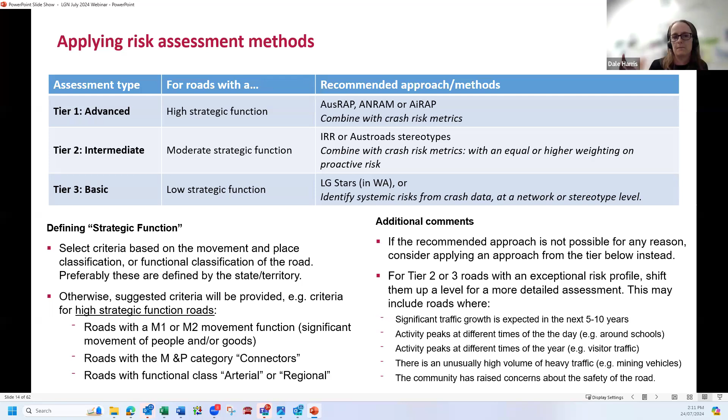There might also be situations where you might have roads that are classified as a low or moderate strategic function, but they have something unusual. Maybe the community is complaining, or there's activity peaking at different times of the year. Again, you might want to lift those up a level and give them a more detailed assessment.

The next slide, please.

So we're going to come up with a couple of interim approaches for those types of networks, either using modified crash analysis, or by focusing on prioritising locations where you have lots of vulnerable road users and high vehicle speeds, because we know that's where a lot of your risk in those inner metro areas is going to be.

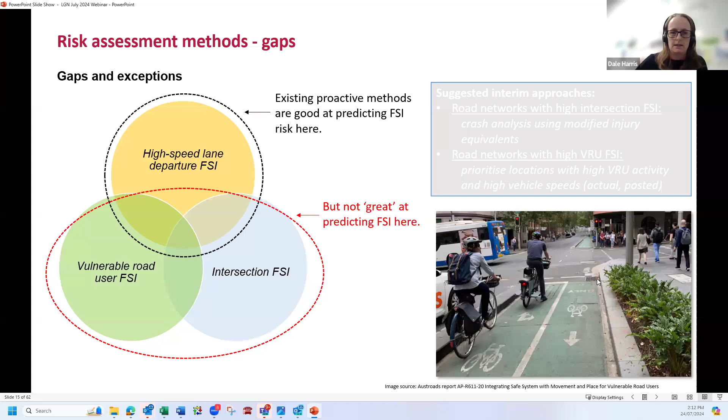So if you're a local government and you are on the journey of doing this yourself, check whether your state or territory requires a specific method. I know, for example, in Victoria, all the roads have been assessed using IRR, and that may be sufficient in that area. So always make sure you follow what your state or territory is asking for. Otherwise, you might end up with an assessment that doesn't match funding criteria.

There's a bit of a step where you need to understand what systemic risks are on your road network and consider whether you might be in that situation with a lot of intersection FSI or vulnerable road users, and bear that in mind if you're picking any of these particular techniques. Consider your network characteristics and identify what might be tier 1, 2, or 3. And then do that kind of pragmatic, consistency check.

If most of your network's in one category, then it's probably okay to apply that whole approach across all your road network. And sometimes, data on road classifications is often out of date or inaccurate. So always bring in that local knowledge and judgment to adjust those tiers if you need to.

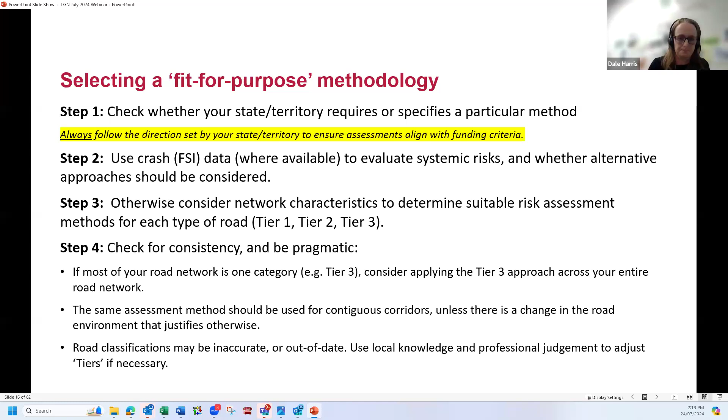Now, I've put a lot of information in those slides, and there's a lot more thinking behind that, and our report to the Commonwealth will provide a lot more detail on some of those areas. But at this initial stage, if you are able to provide feedback, we'd really love that. We're going to send out the slides and a very short survey after the webinar asking these 3 questions. We have a really tight turnaround to get feedback by the end of business Wednesday next week, but we really appreciate any feedback, good or bad, that you can give us on this framework we've come up with.

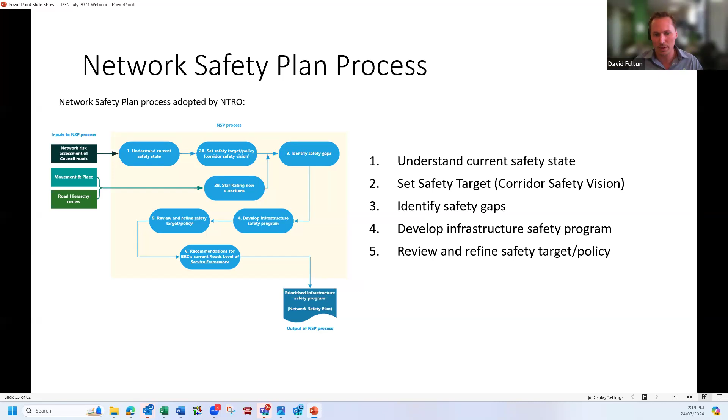The first step, as I mentioned, is to understand the current safety state. We mainly went about that using an AusRAP and ANRAM assessment of all the sealed roads and major unsealed roads on our network, which equates to about 2,170 kilometres of road. So we have a fairly large network.

For the sake of time and simplicity, I'll leave ANRAM alone, but I'm assuming quite a few people on the webinar might be familiar with AusRAP. For those who aren't, it's a proactive network level infrastructure risk assessment tool. For each 100-metre segment on our road network, there were 78 infrastructure attributes which were coded, and these attributes are known to impact crash likelihood and severity. By coding each of these 78 attributes, it translates into a 1 to 5 star rating system, where 1 star is the least safe road and 5-star is the most safe road.

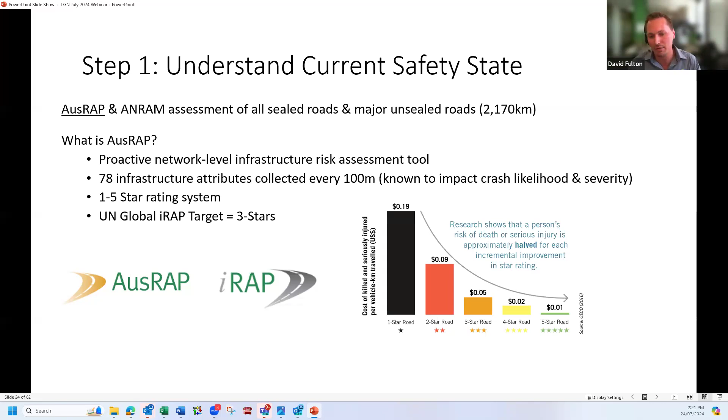As shown in the little graph in the bottom right-hand corner, each incremental improvement in star rating leads to a halving in the risk of death or serious injury, according to the research. In terms of a target, the United Nations Global iRAP target is 3 stars, which is seen as an achievable target, rather than gold plating everything and aiming for the 5-star target.

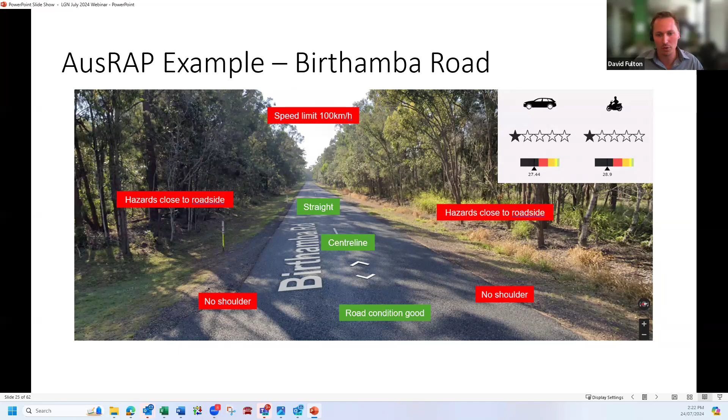The second step in the network safety plan process was to set a safety target, or corridor safety vision. We initially set this target that all new roads would be 3 stars or better, and for the existing road network, that we would target 80% of travel on 3-star or better roads. This target was set so that it aligned with higher level strategic documents, such as the United Nations Decade of Action for Road Safety, and also the National Road Safety Strategy.

To ensure all new roads achieve this standard of 3 stars or better, we went about reviewing our current road typical cross-sections. We made changes to them to ensure we were able to achieve this target of 3 stars or better for all road users, according to the movement and place classification as well. Once we'd refined these cross-sections to a point where they achieved that 3-star or better target, we then used these cross-sections and compared them to the existing road network to identify where the safety gaps were.

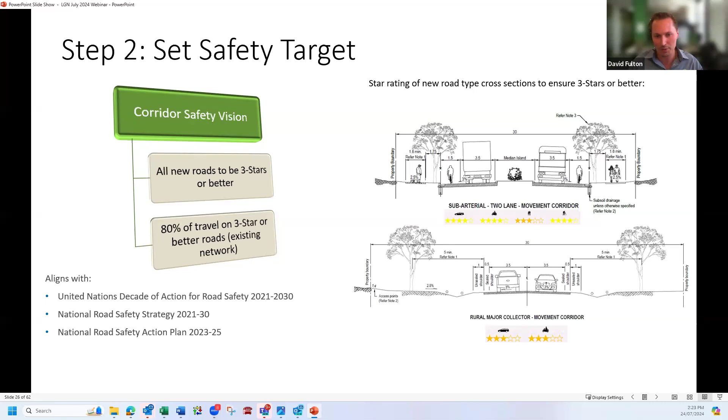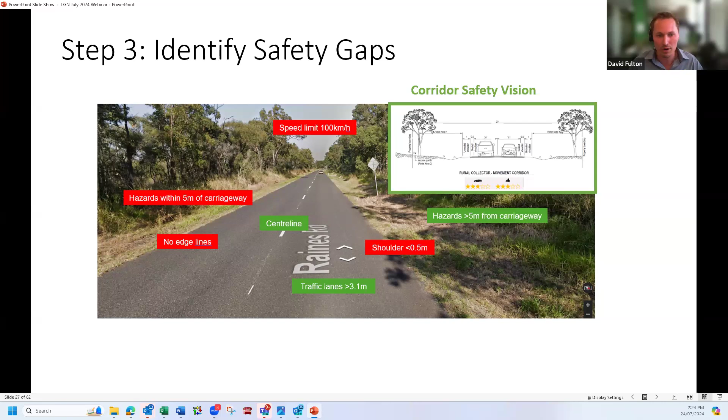However, on the other side, we have close roadside hazards. There's also no edge lines on this road, and the speed limit is higher than desirable. So those are the safety gaps. And then what we did was identify treatments which would treat these safety gaps. So for instance, where there's no shoulder, we might apply a widening treatment. Where there's no edge lines, we might undertake delineation improvements. Roadside clearing, where we have roadside hazards in close proximity to the carriageway, and a speed limit reduction to address the high speed limit.

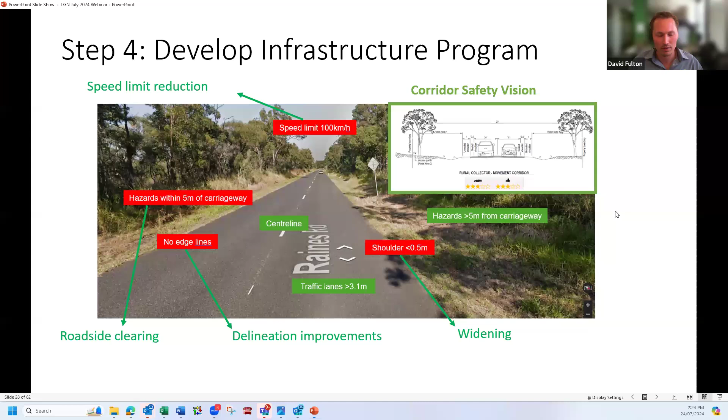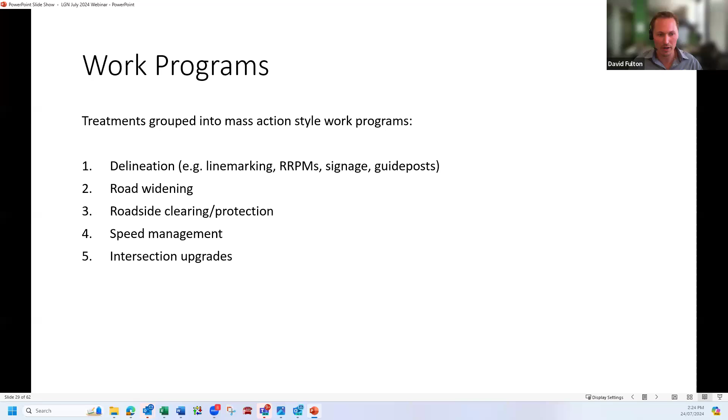So all of these treatments were then grouped into mass action style work programs: delineation, road widening, roadside clearing and protection, speed management, and intersection upgrades.

And so a cost was applied to each of these treatments, and then the impact of these treatments were reanalyzed using the AusRAP and ANRAM models to identify the improvement in star rating and reduction in FSIs.

But once we basically prioritise each of the individual treatments against one another, that then allows us to - and on the next slide - it's coming.

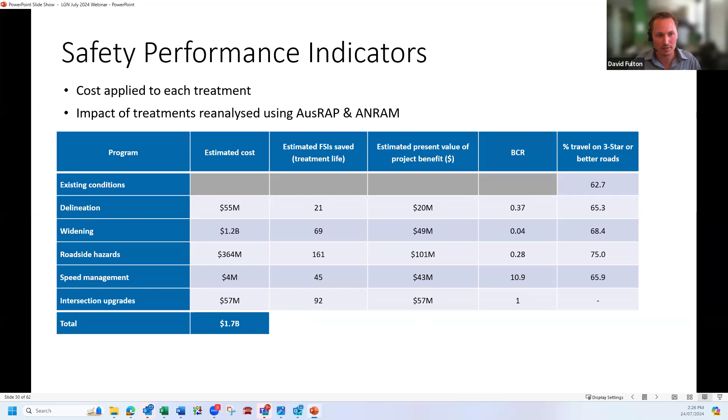So once we prioritise each of the individual treatments against one another, this then allows us to define what is the cost to achieve our target of 80% of travel on 3-star or better roads. And so this is where we're at the moment. This is sort of the loose end we're just trying to tie up at the moment.

But once we define the cost and we define an investment time frame, say it might be 10 or 20 years, we can then work through with our council a review and refine process where we determine whether or not that is affordable, whatever that cost is. And if it's not, then we go through a process of refining that safety target and again, defining the cost and seeking to achieve a point of affordability so that we have a defined investment timeframe and it's something that's achievable.

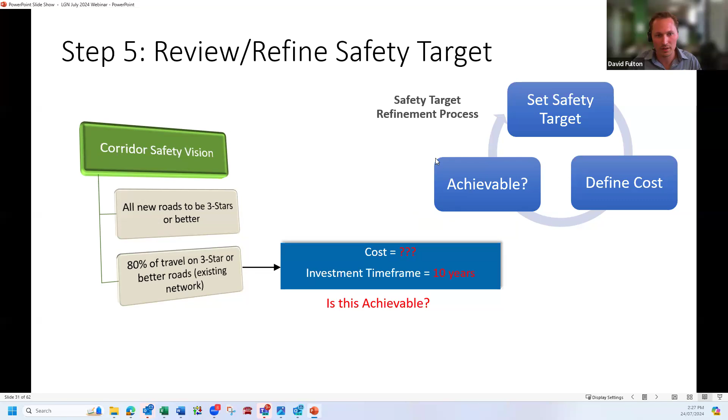So some key takeaways and lessons learnt from our network safety plan: low-cost treatments applied en masse likely deliver the greatest benefit to the entire road network. Achieving the National Road Safety Strategy targets on local government road networks is going to require significant investment that's beyond current funding levels. And that's probably no surprise to anyone.

Then also, it was interesting that Dale touched on this, that there's potentially improvements required to proactive risk assessments for intersections. So just to highlight that point, there's only 5 AusRAP attributes that relate to intersections out of those 78 attributes. And just to highlight that point further, in terms of the Bundaberg road network, there's only 14% of travel in urban areas that's on roads that are less than 3 stars.

So that's 14% of travel on roads that we would say are unsafe according to the AusRAP model. However, these roads, urban areas, account for 67% of all FSI crashes on our network, and then 45% of those are intersection crashes. So I definitely agree that there's some improvements needed in that proactive space for intersections.

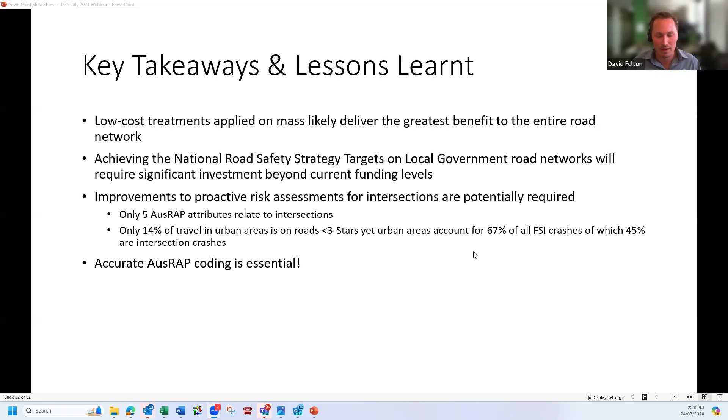And then finally, accurate AusRAP coding is essential. That's the foundation of the building blocks for the network safety plan as we undertook it. So it's important to get that right to avoid issues down the track. And yeah, that's me done. Just trying to flick to the final slide. So thank you very much, everyone.

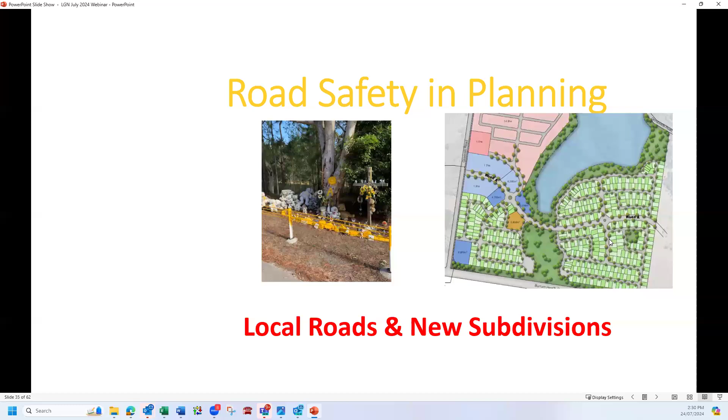Road safety in planning, local roads and new subdivisions. So why bother about road safety when planning new subdivisions? Because thousands of kilometres of new roads and developments are created from new subdivisions each and every year. New South Wales councils had 11,000 kilometres of new roads in their networks over 10 years. That's over 1,000 Ks each and every year to the New South Wales network, and many thousands of kilometres to the networks across Australia and New Zealand.

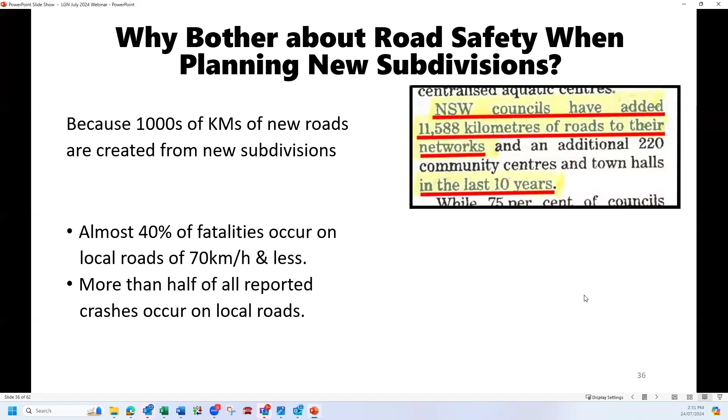And why do we bother about it? Because almost 40% of all fatalities occur on local roads of 70 kilometres and less, and more than half of all reported crashes occur on local roads. Here's an example of a crash map from the subdivision. As you can see, far too many crashes and even some fatalities.

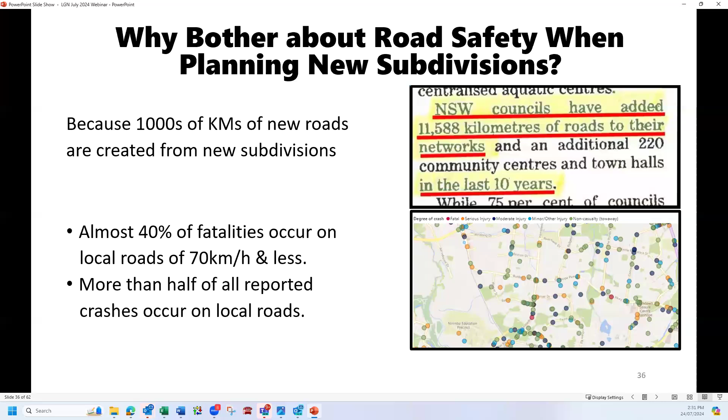Austroads. Safe system in the planning process states good planning and design sets the foundation for a safe road environment. Some of those graphics show that the probability of survival of various crash types varies at different speeds, and I wanted to highlight the lower speeds. We've got a 10% chance of survival of a pedestrian hit by a vehicle at 50 k's an hour, and only a 20% chance of survival of a near-side impact crash.

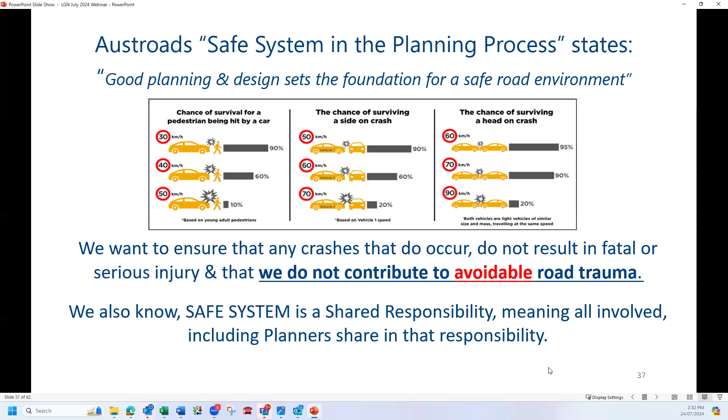We want to ensure that any crashes that do occur do not result in fatal or serious injury, and that we do not contribute to avoidable road trauma. We also know safe system is a shared responsibility, meaning all involved, including the planners, share that responsibility. And when dealing with developers and consultants, we can say that they form part of this shared responsibility, and that it's a reflection on them as well.

This case study goes through the whole development process, right from the start of the rezoning of the land to the occupation of the dwellings. It's basically relating to the road safety aspects, and that's probably over about a 12-year period. So starting with the master plan, as you can see on the right side of the screen, this proposal will ultimately double the size of that suburb.

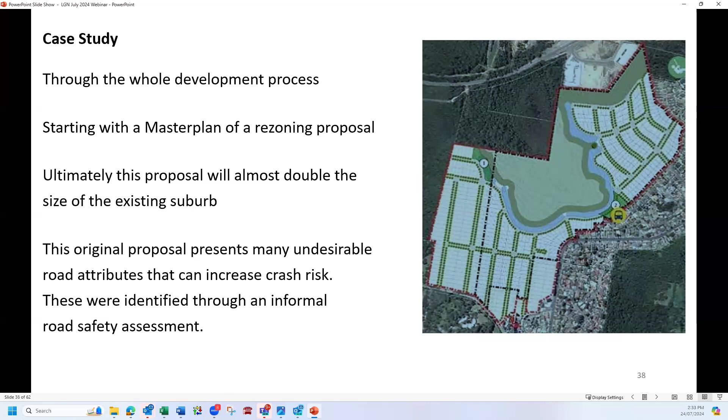The original proposal presents many undesirable road attributes, and they can increase crash risk. These were identified through an informal road safety assessment, and we were looking at the areas of increased crash risk, mostly ones that can be easily mitigated. Through this assessment, we can explain how and why there was increased crash risk, so there is a better understanding of this by the planners, the consultants, and the developers.

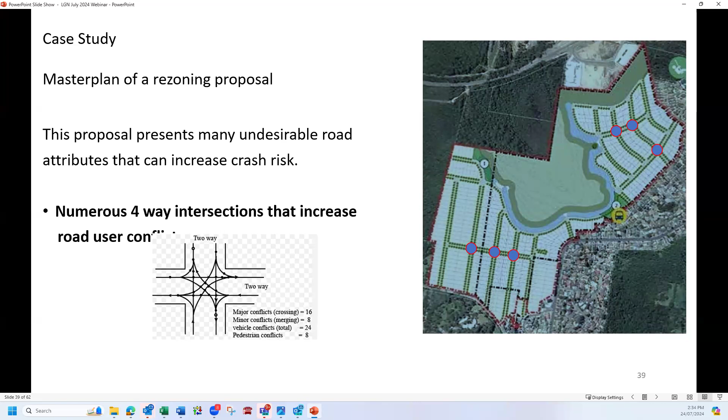This identifies numerous four-way uncontrolled intersections. These have significant numbers of conflicts, and by introducing a different road layout, like staggered T intersections, we can significantly reduce conflict points.

We've got 4 intersections that were originally proposed onto an adjoining road, and this existing road has unsuitable geometry to introduce 4 intersections, and this road was also a higher speed road with a known crash history. Very often we have found that people that come up with these master plans, landscape architects or other people, don't appreciate the complexities of putting intersections in certain locations or even developing appropriate road layouts.

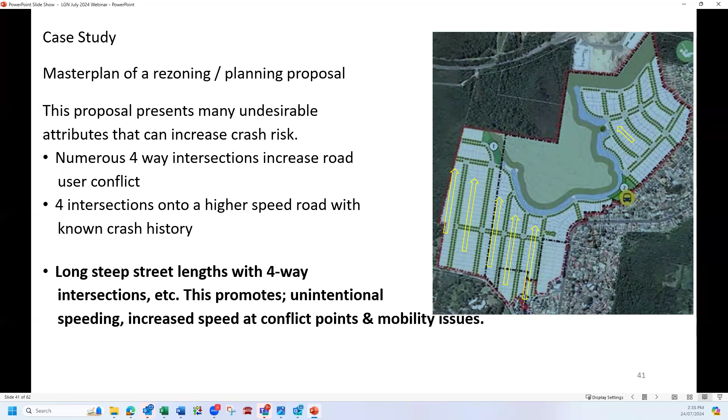As you can see, we've got long lengths of roads that don't have many intersections. These are also down a very steep grade. If you can see the contours, some of these roads are over 500 metres long, and these long steep roads promote unintentional speeding, also increased speeding at conflict points and mobility issues.

So all these attributes are only some of the issues that we identified through the assessment. Others include intersections over crests where no sight distance is provided, combined horizontal and vertical geometry increasing runoff road crashes, even at very low speeds, and undesirable locations for pedestrian and cycle connections.

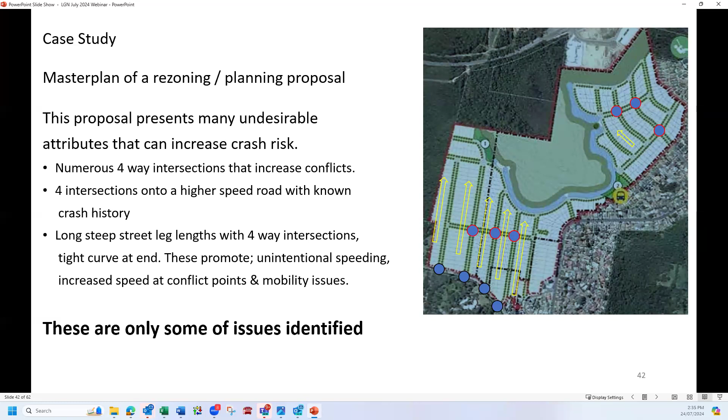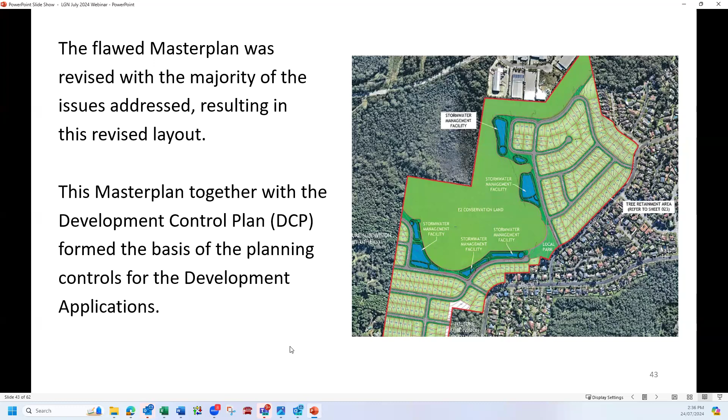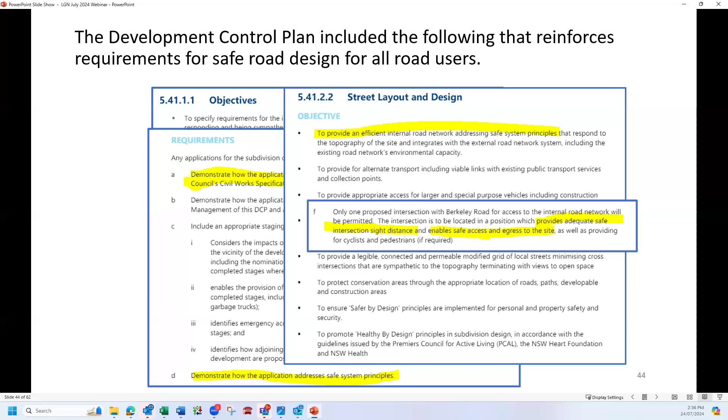The development control plan included the following, and these are extracts from the DCP that was developed for this site. There's quite a few, and these all reinforce the requirements for safe road design and for safe road users and safe systems, and that was embedded throughout the DCP for that site.

The development approval includes conditions of consent after assessment of the development application, and that also includes assessment of the traffic impact assessment. Our standard planning controls include conditions of consent. One is an extract below, which is for a detailed design or a pre-opening road safety audit, and it identifies prior to the Roads Act works or the subdivision work certificate.

A detailed design road safety audit for the project needs to be prepared by minimum level 2 and level 3 road safety auditor registered on the New South Wales Register of Road Safety Auditors.

The audit is supposed to be submitted to council, and no recommendations to be made in the audit to address any of the deficiencies. Resolutions of the identified deficiencies are to be carried out in consultation with council, and council will sign off on the corrective actions prior to issue of the approvals.

To the right-hand side, that's an extract out of our civil works specification, and it shows our road safety audit page, and that is about 11, 12 years old now. It needs updating, but it shows an intervention level table for road safety audits, and at the time we put in also road safety checks for minor developments.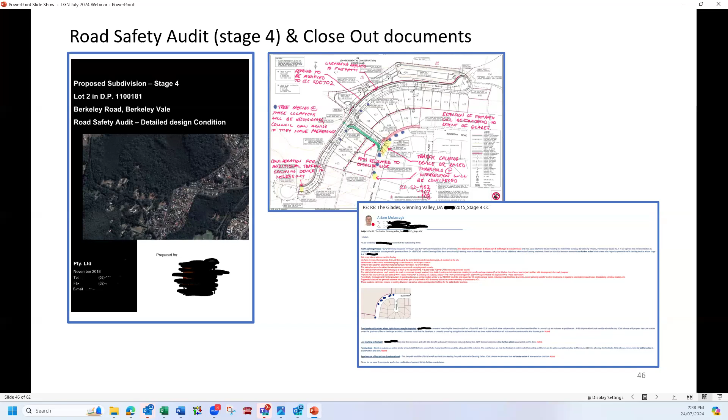The subdivision work certificate, I should have mentioned it earlier, there's a New South Wales planning terminology, and the subdivision work certificate is the detailed engineering design for the subdivision works. These include the road and intersection design, geometry, drainage, pavements, path systems, street lighting, and so on.

So the subdivision work certificate engineering design included all the road safety outcomes that were settled through the initial master plan assessment, the revised master plan, the development of the planning controls, the DA assessment, which included a review of the traffic impact assessment.

And traffic impact assessments, by the way, is supposed to include a road safety assessment, but majority don't. They just include a crash map, and they call that their safety assessment.

The DA conditions included compliance with council civil works specs, and also the provision of pre-construction and post-construction road safety audits, the road safety audit closeouts, and the detailed designs that were prepared as a result of all those documents.

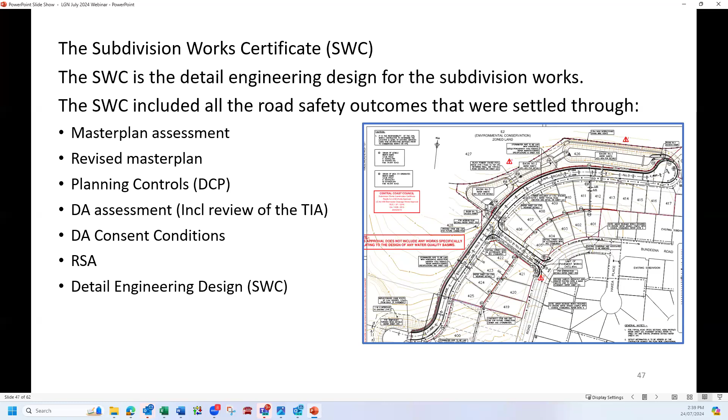On a personal observation I'd like to make, many consultants and even planners think that they can use a traffic engineer and they do all the related traffic issues. But my view is that traffic engineers, design engineers, road safety engineers, transport planners, active transport consultants, and so on are not interchangeable, but they all contribute in some ways to improved road safety outcomes.

I'll just go on to this page, top left corner is a crash map of the new subdivision. As you can see, 0 crashes, although it's early days too, 4.5 years since we released the first lots for that subdivision. The middle top, as you can see, there's a crash map with numerous crashes around that bend. This bend initially had no houses fronting it and a safety barrier protecting runoff road crashes from entering the vacant land. As we had to provide new houses and new dwellings in there, we had to remove the safety barrier, and we looked at the cause of the runoff road crashes, not the protection of the crashes occurring.

So we introduced, on the two pictures on the right-hand side, slow points or traffic calming devices for the entry into that curve. And if you can see back over onto the crash map, you can see that curve there, and there's no crashes since they were installed.

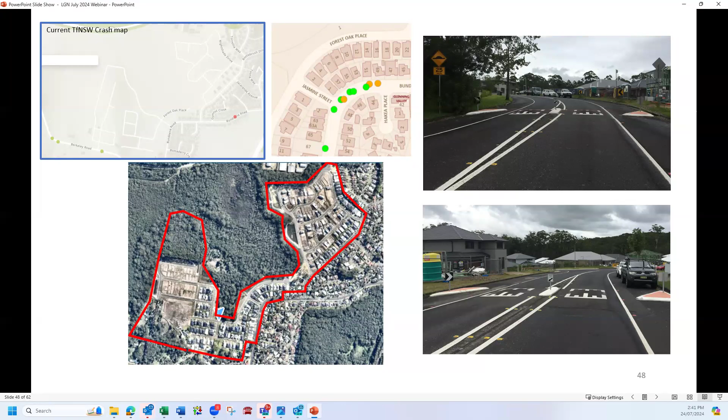Takeaways: early intervention is critical. Initial road safety assessments can eliminate the majority of main safety issues. This significantly reduces and delays costs further in the process, where there can be opposition and difficulties getting changes even after road safety assessments to the project. We can end up with poor mitigation treatments that may only address some of the aspects.

Number 2, we need to apply safety assessments throughout the process. You will get more complete road safety outcomes, as occasionally some issues do get missed through a process, but where multiple processes apply, this can eliminate the Swiss cheese effect and builds redundancy into the system.

Number 3, ensure that strategic development planners are on board. They understand their roles, and you can bring them on board by showing they can contribute to improving road safety.

And lastly, a significant amount of road trauma can be avoided if we use the tools available to us. We know there are numerous tools out there that we can use, and we cannot contribute to avoidable road trauma. Thanks.

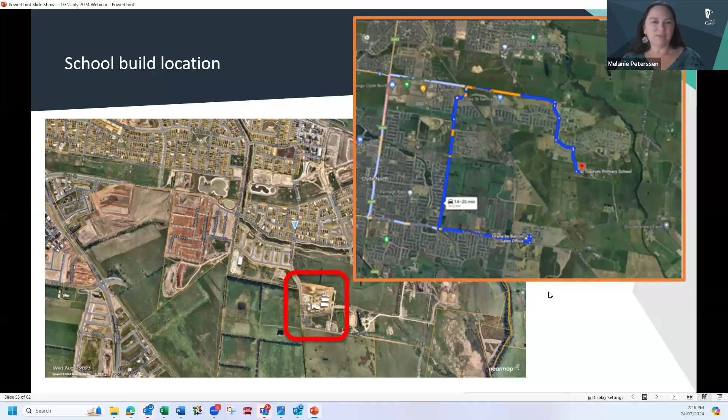Okay, so this is the site at which we became involved, which was in August 2023. And so the road safety issues were fairly clear. So we've got 3 bordering roads around this school. 1 is not yet built and 2 are no-through roads. So there's clearly also a lack of existing infrastructure, footpaths, crossing points, all of those.

We've got ongoing heavy construction vehicles in the area, and the school was to open at the end of January 2024, and ongoing construction would be in the area for the foreseeable future. Obviously, the changing nature of the road network is going to keep occurring. And if you see along the bottom of that picture, there's nowhere for vehicles to turn along the school frontage.

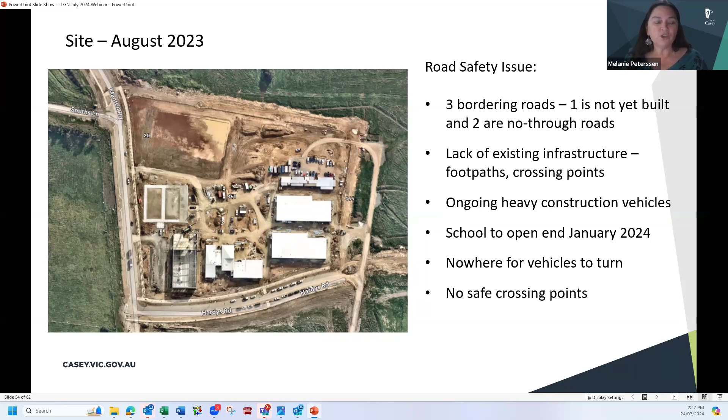Sorry, Kate, if you can just go back.

The future planning catered for all of this. However, the incomplete construction means that there's inadequate facilities for the immediate need.

That's okay, just run with it.

Okay, so one of the key things for us was engagement. So we engaged with the principal 5 months prior to the school opening. And so the Safe Around Schools team that I'm involved in, we initiated a meeting with the principal to talk about student numbers, potential issues and communication needs.

Next slide, please. So the interventions. So from a council perspective, given that there was a no-through road on the school frontage along the bottom, we had a temporary turning point installed along with signage and road marking. There was obviously liaison between the estate developer, Victorian School Building Authority, traffic engineering, and the school crossings team to plan the crossing points, the line marking and the signage.

We engaged with the school community before the school opened. So we provided a parking map, we attended the parent information night, and we attempted to get that message across about developing a strong road safety culture and remind the parents that predominantly they're going to be the only vehicles in the area.

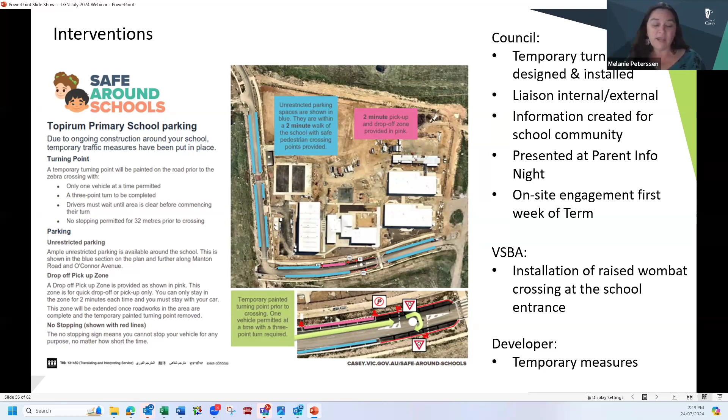The Safe Around Schools team that I'm in also attended on the first week of term 1 just to engage with parents on site, distribute some more printed information, observe behaviour and identify issues. The VSBA installed a raised wombat crossing at the school entrance, which was fantastic. And the developer also had temporary measures, including barriers and line marking.

Sorry, Kate, can you just go back? I know it's doing some weird timing thing on its own.

So in a nutshell, the school has 3 priority access points currently for pedestrians, and none of them are particularly user-friendly for the foreseeable future. And on the west side of the school, we've got our cultural heritage overlay, and that's resulted in us not being able to construct a footpath on the west side of the road.

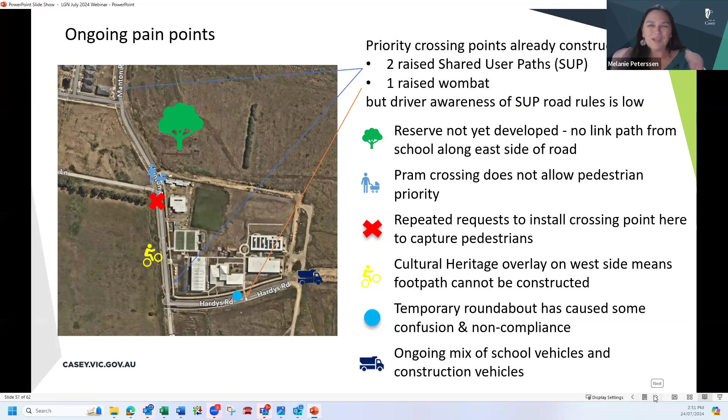So what were our lessons learned? Okay, so it wasn't really a lesson for us, but we certainly learnt that short-term engineering fixes can't solve the problems associated with delayed infrastructure. So the school was opened ahead of the development of the whole area, and we can only do short-term fixes. Council had to balance the Department of Transport and Planning's recommendations and guidelines along with the Department of Education's decision to open the school in advance.

So, for example, the low pedestrian and vehicular movement meant that supervised crossings were not warranted. The speed zone guidelines by DTP meant that before any other sort of activators along that road, we wouldn't be able to apply for a permanent 40k limit. So any changes also needed to be temporary because they'd have to be reversed. So that's why we had temporary speed limits via a traffic management plan. We had the temporary painted turning area in the roundabout.

The other thing which happens everywhere, but most of the interventions actually rely on drivers and pedestrians behaving in the correct manner. So some of those are not doing that, obviously, and despite the fact that we distribute a range of information electronically, in person, in a range of languages, in a range of mediums, and we engage really early, we're still seeing some of that concerning pedestrian and driver behaviour that we see elsewhere as well.

I guess the irony in this one is that we have school families complaining to council and to the school about the behaviour of the drivers and pedestrians, who are really also only the school families as well. The construction traffic even avoids the area in school peak times. So really it's one lot of families complaining about the behaviour of the other lot of families. So that makes it difficult and it certainly pushes our focus on education.